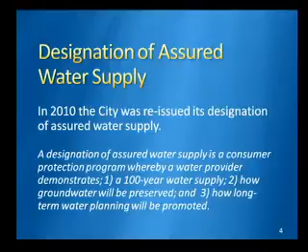So let's jump into Goodyear's water resource update. In 2010, the city was reissued its designation of assured water supply. The designation of assured water supply is a consumer protection program whereby a water provider demonstrates a 100-year supply of water, how groundwater will be preserved, and how long-term water planning will be promoted. The Arizona Department of Water Resources Assured Water Supply Program operates to sustain the state's economic health by preserving groundwater resources and promoting long-term water supply planning.

We'll touch on water supply planning in just a little bit. Also, the Arizona Department of Real Estate requires a demonstration of assured water supply, which allows development to issue a public report and sell lots. Because the city was issued a designation of assured water supply, development is only required to obtain a written commitment of service from the city to demonstrate their assured water supply. So, in essence, the city controls its own destiny.

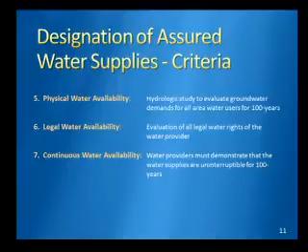We try and plan for all conditions. Let's say, for example, we're dealing with drought right now, and the Central Arizona Project declared a drought which reduced specific water users on the CAP system. Hopefully we've done our due diligence and have a long-term storage credit bank account, so we can say our CAP water is uninterrupted because we can pull from that bank account and put it into our delivery system. A lot of water providers, and the state of Arizona itself through the Arizona Water Banking Authority, has bought, since 1994, over 3 million acre feet of excess CAP water, stored in Tonopah and other recharge facilities. So if the state were to encounter a shortage, there's a system that could provide uninterruptible service for CAP. Similarly, we try to do due diligence to have a robust system that we can claim is uninterruptible.

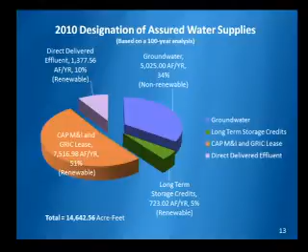I have a question on that. I know we talked earlier, so I don't have too many questions, but with the long-term storage credits, is there a maximum to how much we can put in that bank? No — whatever water supplies you have and the recharge facilities you choose to use, whether it's recharge or partnering with an irrigation district for a groundwater savings facility permit, whatever your access to, you can get credit for if you successfully have a permit and you recharge it. So we can continue to build that bank over the years.

Once again, there's delivered direct effluent, primarily from the Rainbow Valley. Back to the reclaimed water point — the higher the quality of effluent we bring, with A+ being the best, provides better opportunity for long-range planning because there are more uses under state law that allow you to use Class A for various things like turf irrigation. If you're doing Class B or less, you're restricted on the reuse. So if our goal is to reuse water, it makes sense to go with Class A+ because it provides the most opportunity. The purple piece of the pie there — you'll see that what was not included in the department's evaluation was our wastewater being treated to Class A+ at the 157th Avenue wastewater plant.

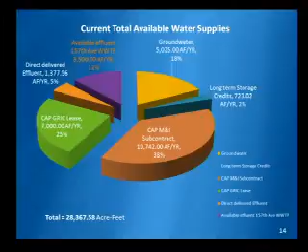So I just want to talk, we already kind of touched on it, I wanted to illustrate just one option. It's just something to consider, and there are virtually limitless possibilities, but it kind of goes back to how much can our long-term storage credit account balance grow.

There's a lot of information in this slide, so I'm going to take the time to explain it. This is basically an illustration of purchasing Central Arizona Project water to meet our projected water demands while growing the long-term storage credit account.

On the left-hand side, the vertical axis, you see the green numbers, that's acre feet from 0 to 120,000 acre feet. On the bottom horizontal axis, those are years, looking at the current end of this year, 2012, out to 2025. The green numbers correlate with the green shaded area, and that is our bank account, the total number of acre feet sitting in our long-term storage credit account.

I'm estimating right now that at the end of 2012, after we're done with all the annual production of water, we're going to be sitting just over 80,000 acre feet of total long-term storage credits available to us. The red line correlates with the other vertical axis to the right, the red numbers. That's our current water production starting here in 2012, just under 9,000 or around 9,000 acre feet. I'm using the 2011 projections, stretching that out, looking at 2025, somewhere around nearing 16,000 acre feet.

And obviously, if we take off in another boom economy, that could go up, or if things settle down, it could go more horizontal. But I want to show you the overlay on that.

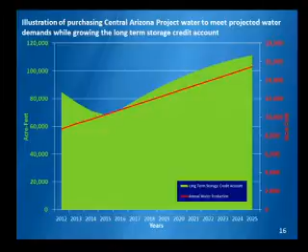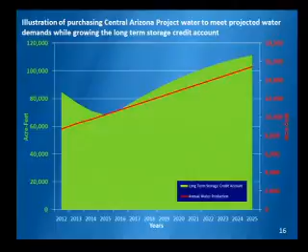I have a question, what is the 2025 population? Where are we on, what is build out? I didn't ask ahead of time on this, so I'm expecting - yes, I want to say we're about 175,000 by 2025, if I remember right. So our population could grow as far as 600,000 at build out. Estimated between 550,000 and 600,000. Okay, thank you.

Let's recap here. The city's total water supply is actually quite robust. It's more than double what the department acknowledged for us, and we're going to work hard to have that enlarged for the department to actually acknowledge. The water resources portfolio is composed primarily of renewable water supplies. The only one that's not renewable is groundwater. So I wanted to recap on that.

The annual CAP orders will allow the city to maintain or grow its long-term storage credit balance and not use groundwater, which is very expensive to replenish, and it's going to become increasingly expensive in the future.

And when the city is able to take direct delivery of the CAP water, the amount of CAP water recognized within the city's designation of assured water supply by the Arizona Department of Water Resources will significantly increase. Just as one more anecdote to recap, right now the Department of Water Resources is looking at a reallocation process.

The final 96,000 acre feet of the non-Indian ag water is being reallocated, and they're going to set up the criteria. So obviously we're going to be very interested in obtaining potentially more of the CAP water. This is the cheapest water supply right now. That process is starting, and we're in negotiations with the department on those aspects.

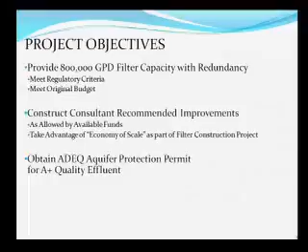We're also going to take advantage of the economy of scale, because with the main focus on the filter, we feel we can add these other recommended improvements - that's a good advantage for the city. Also, an important part of this project is to get an amendment to the APP that we currently own, and upgrade the effluent quality from B+ to A+.

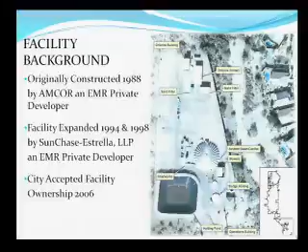As Jack mentioned, the plant is a little aged, so we thought it might help to give it some context. The plant was originally constructed in 1988 by Amcor, which was an EMR private developer at the time. The facility was then expanded in 1994 and 1998 by SunChase, also a private developer then. The city operated the plant, but did not accept ownership until 2006.

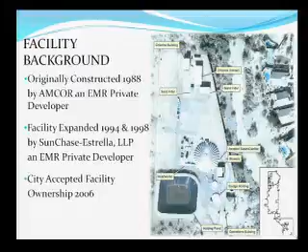In addition to the site plan shown earlier, I thought it would help to give context on some of the facilities and processes we'll discuss later. In the upper left-hand corner, we have an aeration and clarification basin. To the upper right is the existing filter basin. Lower left is a sludge tank we'll talk about in detail, and lower right is a plant water system where we use the effluent for maintenance and operation of the plant.

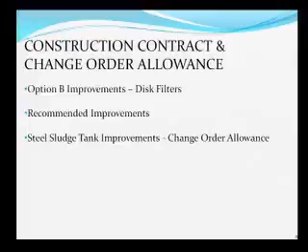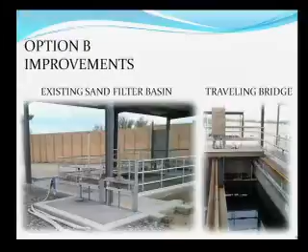So what is the disc filter? Basically, it's woven polyester discs that sit on a center drum. It rotates as spray nozzles spray the filtered material out of the flow, and then it gets out through the backwash.

I still have the same question, because filters are filters. Is there a lining that has to be replaced, or are those sustainable, or am I thinking in the wrong direction, like a pool filter? The anticipated design life on these is somewhere between 5 and 10 years, depending on use. Basically, they're like pie slices or pizza slices, and they just clamp into place—there's about 10 to each circular disc. So that's how we budget for those, since they have a life to them. Right, that'd be part of the O&M. That answered all my questions. Oh, I have a question on that. Oh, did you?

Okay, I'm getting all into this filter discussion. So if it's a pizza, if we take out one slice, do you have to replace the whole pie, or can you just replace the slices if they go bad? Well, you can do that. You replace the slice, the piece. You can also put in a blank, but yeah, they're designed so that if you had a tear in one of them, you can easily just take that whole piece out as the one slice.

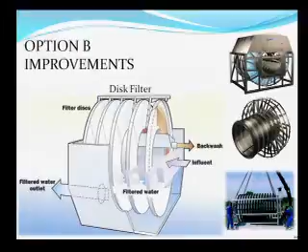Now that no one has any other questions, I'd like to turn it over to Jerry.

Good evening, I'd like to go over the recommended improvements. They're classified into two categories: one is capital replacement, and the second one is treatment processes for providing A+ effluent.

On the influent flow meter, same thing - there's currently an existing meter installed 24 years ago. It was installed upstream of the backwash water, so when the filters do a normal backwash, it was going through the meter again, basically double counting the water. That was not efficient, and it wasn't good for our reporting. So we installed a temporary meter outside the plant, but unfortunately it has to be manually read every week and downloaded into a computer. This will replace that.

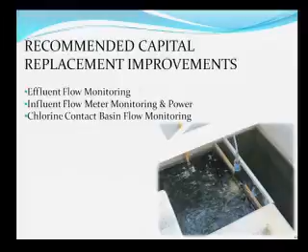As we move to an A+, we have to improve that efficiency, so we're recommending that a flow monitor device be installed. When the flows increase, it will increase the dose of chlorine, and as the flows decrease, it will decrease the amount of chlorine being added. The chlorine contact basin then does the disinfection part, with a certain amount of contact time with bacteria to make sure everything's killed.

What happens is manually we have to have somebody go in. You see those valves that are red above ground - they have to physically operate those to divert the solids. So by putting in the automation, it takes away the manual part of it, and makes it more efficient.

So that means the person had to stay on site during that? Was it a rotating time, you said manual, somebody was up there? Yeah, what they had to do is look at the process - for example, go into where the aeration basin was and take a look at the bugs, as we refer to them. If they were healthy, they didn't have to worry about anything. If they were not healthy and needed more food, the solids, they would have to add some more solids to the process. That's where the manual part came in.

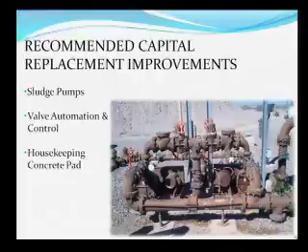The housekeeping concrete pad - whenever we do any kind of change to the valves, pumps, or motors, switch them out, we have to capture all that waste. We're not allowed to let it go on the ground, so right now we have to put down tarps or other mechanisms. This pad would create that containment area, and on top of that, it would give a more solid base so those pumps and motors do not have undue wear and tear.

It's amazing, isn't it?

The plant water system, which Brad talked about briefly, was an internal system. It takes the effluent, installed in 1988, and recirculates the water internally for cooling, for maintenance - basically the internal process. And that is, again, outside its useful life.

Then we have the steel sludge digester tank, and as part of this contract we have $17,000 for an analysis. We couldn't empty it and do a full evaluation, so the contractor will divert the flow around it, hire a structural engineer, go inside, do an analysis, and provide the results to staff. We'll take a look at it, then we're looking for a contingency not to exceed $100,000 to do any repair or replacement needed of the tank.

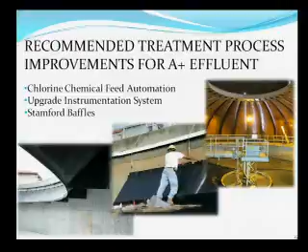So, are we going to replace the steel tank? I thought I heard we were, and then at the end I heard analysis. Yeah, in the bid contract it was for an analysis, so we don't know what the interior looks like. We don't know if it needs a simple repair or total replacement. So it could be just the rust that you're talking about, the big tank we saw. Yeah, there's rust showing on the outside, but the internal part could be acceptable. Is that what you're saying?

Okay, because knowing what I know about steel tanks, they don't last. These are 24 years old. I can't imagine the inside looks much different than the outside does. And if I could add, the $100,000 is the maximum price, and that's for full replacement. So we'll take a good look at it with the structural engineer, but that's the maximum we'll pay, and it would be full replacement. Okay, so that's included in that, that's where I was going. Exactly. Okay, all right, thank you.

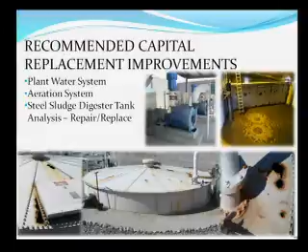I'm sorry, one quick question. Seeing that hole on the previous slide, if there's a hole like that, or even small cracks way deep down underground, could it be leaking into the ground? Could it be small amounts, seepage? I don't know, it's actually constructed into a mountain, so it's solid rock. Oh okay, that's part of the challenge with this process. Whatever leakage does occur may be a little bit of liquid, and I really don't know what that would be like until we actually see the tank. I see, so obviously it's not like some Superfund site underneath there. This is absolutely not. Okay, thank you.

So the improvements for the A+ effluent include a chlorine chemical feed automation. This is after the chlorine contact basin. What we like to do is have a chlorine residual as the effluent goes out into the system, so it contains a little bit of disinfection potential. But if we go to the wash, we have to completely dechlorinate, so we have to shut the chlorination system off and then dechlorinate any chlorine residual that's remaining. That's what this automation system is for.

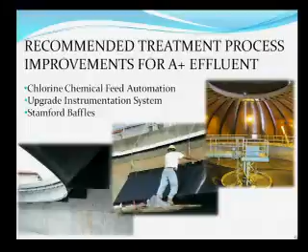My recollection, and I think it'd probably be best to go back to the staff reports, is that there was an agreement that the plant was constructed. We had the opportunity to inspect and then accept, and I think we accepted 3 or 4 years ago. Is that right? The actual acceptance by the city was 2006. So yeah, it was, and the agreement predated that by a number of years, because I know we've been through a process before we finally accepted the plant.

But we can dig that up and get it to you. We can get the details on it, but there was conversation on it. It took quite a while to get to plant acceptance. Yeah, it took quite a while.

Yes, Wally. In the slides, one of the slides talks about the participation agreement from 2011, and it says what the cost sharing share is. But then, I don't know what slide I have up now. Have we gotten there yet, or are we coming up to that? I think the next slide is going to break out all the costs. Can we wait? Is that in addition to this other?

There's 2 components to this contract. One envelops the participation agreement that shows the 660-330 split, and that's what we agreed to in June, knowing that was an engineer's estimate, and knowing we needed to fine tune that when we got a bid contract. Then the other larger portion is the capital replacement part that we needed to do for our plant that we run and operate.

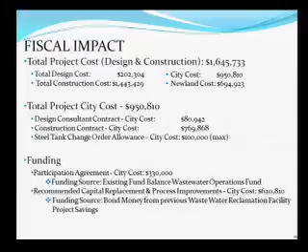Is there more? Is that it? I have next steps and stuff. Oh wait, is there more? There is more, I thought there was. My apologies.

This is just to let you know that a week from today, on the formal agenda, you will see the amendment to the participation contract and the change order that's part of the contract. That's all. Any questions on that part of what's coming up? Next steps.

Yes, Mayor, members of the council, just a couple of follow-up items as a result of the work session tonight. One, make sure you know there is community outreach associated with this plant expansion, so stay tuned, we will provide a schedule of activities and other information. The second is, and I am going to do this via yellow paper, we'll give you a background on the staff report going back to 2006 on the acquisition of this sewer treatment facility. That will include the staff report as well as updated information.